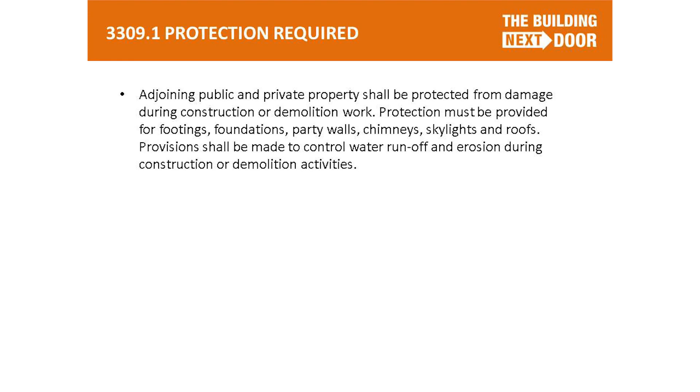Well, when you have this problem, this conflict, what do you do? Well, the developer knows that the building code requires that they protect the adjoining property. Chapter 33 of the code is the one that governs this. It starts out by saying you have to protect, if you're doing construction and demolition, the next door property. Number two, the code says get a license to go onto the property next door, because that's how you'll be able to effectuate things. It doesn't mandate that a license be given to you, but you should get a license to go on there.

And interestingly, it gives an adjoining property owner a real hammer if it's a multiple dwelling. The landlord in the adjoining property could say, okay, I'm going to give you access, but you could have rent stabilized or rent controlled apartments, and they may not give you access. The code says if they don't give you access, that is a basis for terminating the lease. That's a powerful tool in this city with regulated apartments.

Now, three, physical examination. This is something that's in the code, and even if you don't have a license agreement, I very strongly urge that you do this. The idea is you go into the property next door and take a pre-construction survey. It's very important because you take the building next door as you get it. It can be a very old building, and it's going to have flaws. You want to document every single crack, every single problem.

Because if you don't, believe me, they're going to claim that none of that was pre-existing, that it all happened because of your construction. I urge clients also to give that material to the other side so they know exactly what you know.

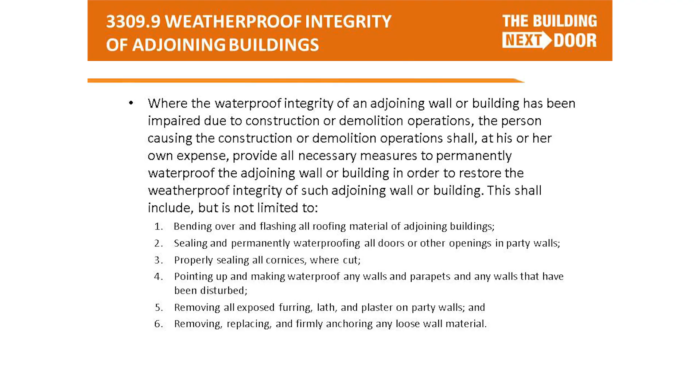Now, 3309.9 talks about weatherproofing, the integrity of the adjoining property. This is something a lot of developers forget about. You could be building — and Rob Schubert will give you a great example, he didn't forget about it, by the way — but they demolished numerous buildings, and you have buildings next door whose exterior wall hasn't seen the light of day in 50, 70, 100 years, and they're not in the condition they were then. They're very porous, very fragile walls. They have to be protected right away.

So you have to do certain things. You certainly have to protect it for waterproofing so there's no water infiltration, because then you're just going to have more damages. But you also have to do things like, if you have a masonry building with wood joists standing for 100 years, those joists are probably not in the pocket anymore. So you have to brace them back, open up the walls, pin them, pull them back, and brace them. You have to stabilize that building before you do anything on your property, and that's very important.

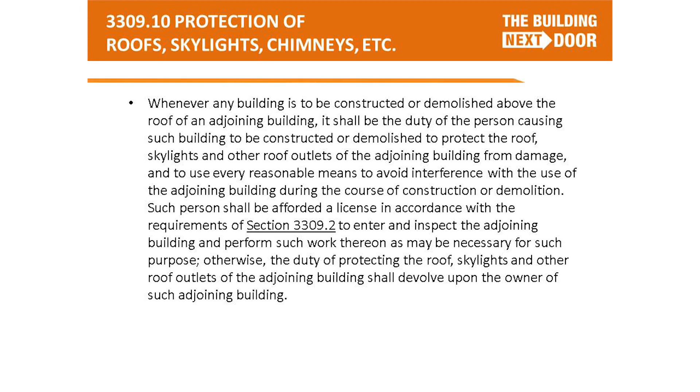The last one I'm going to speak about is the basic one — protection of roofs, skylights, chimneys, etc. If you're demolishing a building that's above the building next door, you have to protect it. If your building is going higher than the building next door, you have to protect it. And again, you'll notice here, if they don't allow you to do it, it says it's their responsibility — doesn't happen. But let's talk about the license agreement.

What are the typical things in a license agreement? First and foremost, you have an express license, whereby the adjoining property owner is saying you can come onto my property and do certain things. Now, the certain things go to the second item, the scope of work, which should be very defined. You want to know exactly what they can do and what they can't do, because problems occur when you don't specify that. A developer will want to focus on the protective work. What I often do is include in a license agreement a set of plans — the site safety plan, of course, and the plans of the building itself.

With emphasis on what it is that the developer is going to do for the adjoining property owner, one thing I do when representing adjoining property owners is insist that we be able to review the entire plans. You get pushback from developers on that, but it's not that we want veto power over the height of the building, the aesthetics, the placement of windows. It's none of that. We want to evaluate totally the construction's impact upon next door, and you really need to see the plans to do that.

I find we have tough negotiations to come into a license agreement. But once you get into a good, comprehensive license agreement with provisions for what to do in the future, you don't have a problem. You have problems when you don't have a tough license agreement that covers everything. Paramount upon everything is safety in the city of New York, and the courts want you to be able to construct things in safety and protect the public.

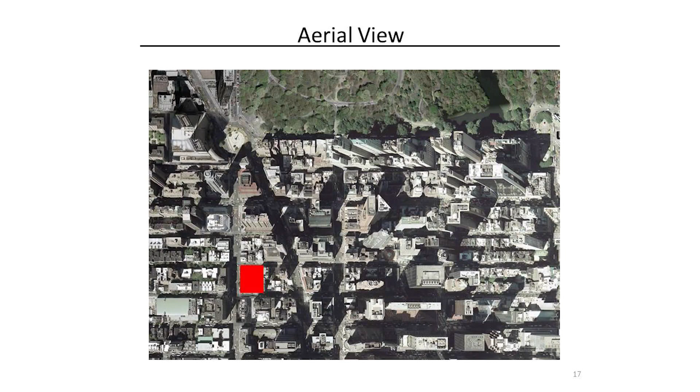So the site is a 1 acre site between 54th and 55th, bounded by 8th Avenue on the west and by 2 relatively low 4-story buildings on the east side.

Designed by SOM, it's a 38-story building with 2 50,000 square foot below-grade floors, 1 million square feet.

When we acquired the property, there were 9 existing buildings on the site, mostly small 4-story tenements, but there was a 14-story building on 55th Street that used to be the Hearst Corporation headquarters. And on the south side, there was a building called the Department of Labor building, another 8-story building that I'll get into shortly. This project has a long history.

We got through foundations, and partially due to the fact that we ran into problems I'm going to talk about, the project ultimately got caught up in the financial crisis. The 500,000 square foot tenant we were negotiating with stalled in terms of negotiations and concluding a lease, and ultimately we mothballed the project for about 2.5 years.

We restarted the project in 2011, and the first 250,000 square foot tenant is moving in this weekend.

So this gives you an idea of the site, and not only did we have the building next door, we actually had one of our own buildings next door.

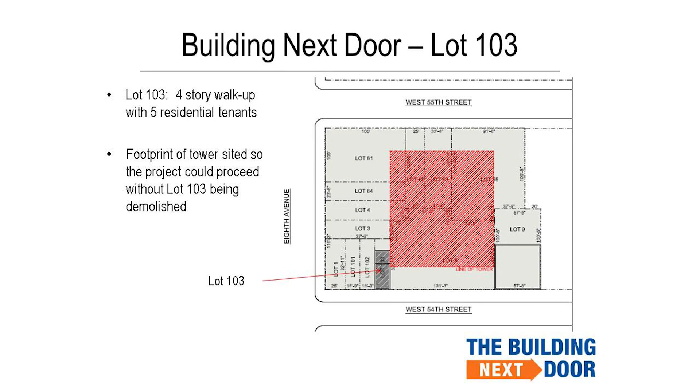This building here, called Lot 103, was one of the tenement buildings, and we went through a whole long procedure of buying out the tenants, getting these five residential tenants out, but as always, there was a holdout. We were prepared to build around this guy just because we had to for our schedule. Ultimately, we did come to an arrangement with the gentleman, and he vacated it. But that's basic - you'll see a better photograph in a second.

And then it comes to Lot 9. As part of the acquisition, we own the air rights to this building. We had a license agreement to underpin the building. We had everything that we needed to get DOB permission, in terms of forms for underpinning, the whole 9 yards.

And I got a call the day that I sent the DOB forms for the adjacent property owner to sign. He says, 'I don't care - buy my building.' And it was tens of millions of dollars.

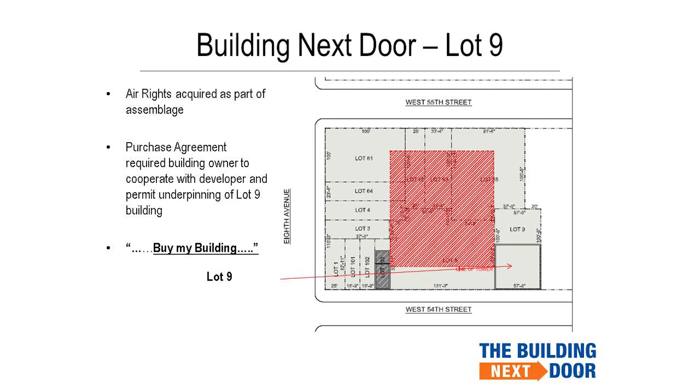And this building here is actually 3 tenements stitched together, rent stabilized, rent controlled buildings. There were some tenants in there since the 1950s.

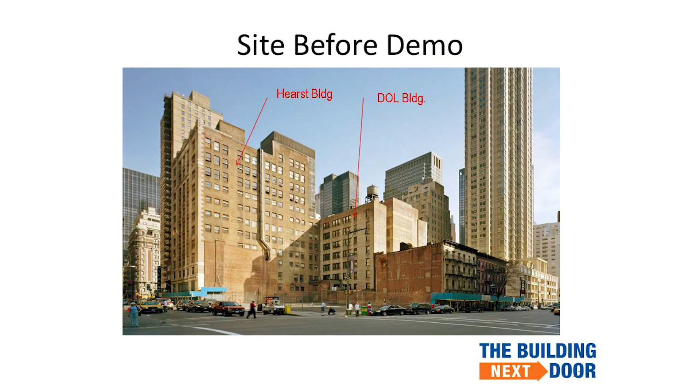So this is a view looking west on 54th Street before demolition. The Department of Labor building is sitting here. This was the Lot 9 building, which still exists today. In fact, now there's another hotel sitting next door to this one as well.

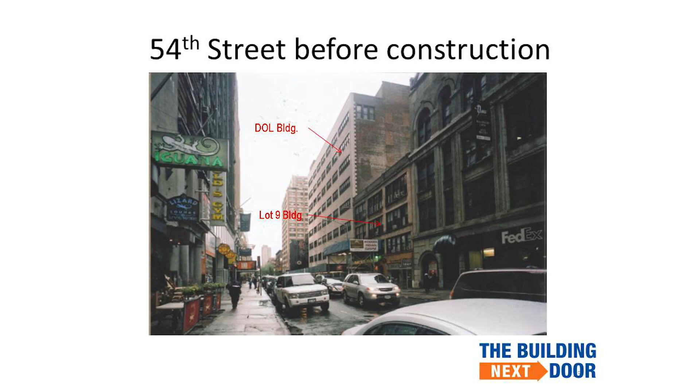It was indescribable in terms of how many issues came up. In terms of due diligence, we did all the due diligence that we could possibly do. Unfortunately, we had limited access to both the Lot 9 building and the Department of Labor building. The Department of Labor had a lease they wouldn't get out of. We had very limited access to get into this building, to do probes, to find out what the heck it was. And in my 35 years of doing this, this is the most bizarrely constructed building I have ever encountered.

It had cast iron columns, it had Roebling arches, it had plate girders on the 7th floor - apparently it was an automobile showroom at some point, and that was all done after the fact. We didn't know any of this when we got into this monster. And so it was a very interesting demolition process.

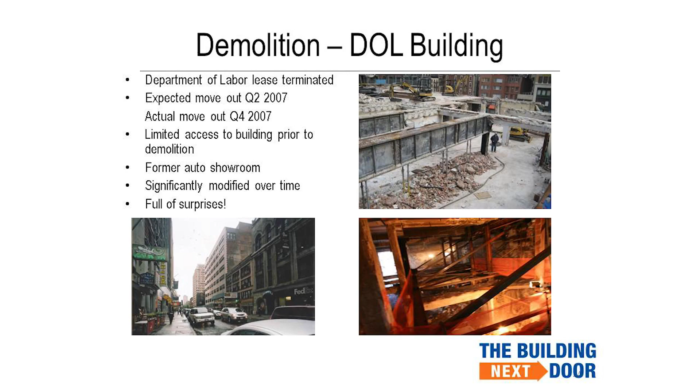This gives you the Lot 103 building. The Hearst building is almost all the way down already. This 14-story building came down like a charm, not an issue.

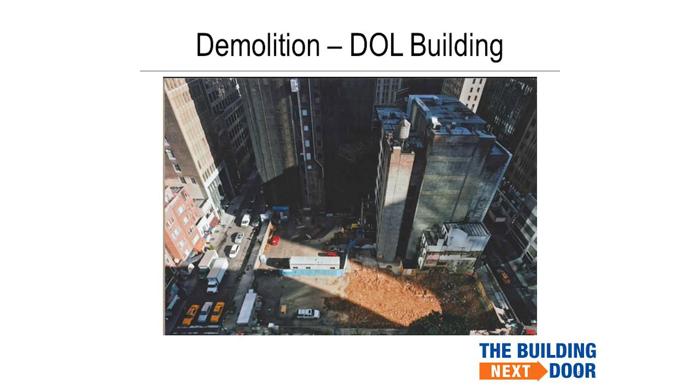The adjacent property owner worked with us, gave us all the access we needed, and then there's this Department of Labor building. So we brought it all the way down from the 9th floor down to the adjacent parapet of Lot 9. And lo and behold, when we got down there, it's difficult to see, but this is the Lot 9 building west wall.

It was 2 wythes of brick thick, and we didn't know it. So my friend Tim here graciously gave us a stop work order till we figured out what the heck we were dealing with. It was totally justified, but very frustrating.

You can see here this is the floor spandrel of the Lot 9 building, and this west wall is 8 inches thick, and it was basically glued to this thing. So if we tore this down, this building is going to fall down.

So we worked with Tim and his group and with a variety of structural engineers and shoring contractors. We had to do 2 things. This is where Ray got involved, and we went through 9 months of court proceedings.

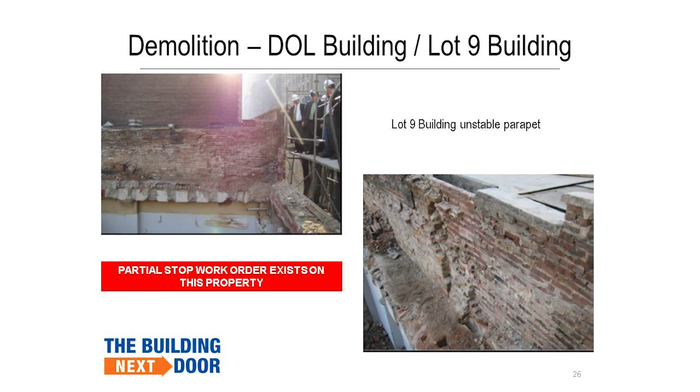What initially started out as a proceeding to get permission to underpin the adjacent building quickly devolved to something else, which was, as Ray mentioned before, where you have to go in, tie the floor joists together, and stabilize the existing building.

If you see all of these channels, what this represents is us drilling a hole through the adjacent building, opening up the ceiling in the adjacent apartment, putting a plate on to basically stitch the floor joists together to secure it to our building.

So what we ultimately ended up doing was leaving the 18 inches of existing construction and underpinning that. We never, in fact, underpinned the adjacent building. We underpinned our own building and stitched the adjacent building to it. But what this represents is 2 things.

We had to come up with a procedure to stabilize the existing remaining bay of the DOL building, which meant we had to build a building within a building. So this is all structural steel stabilizing this wall, stabilizing the floor plates, and we had to do it floor by floor. It became a nightmare.

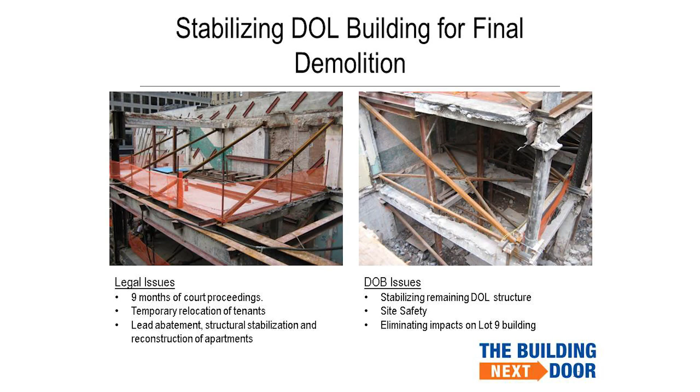What you're seeing here is after we got the building stabilized with structural steel, it took us about 4.5 months under a partial stop work order, with many meetings with the DOB in terms of sequencing how we went down, because again, as we opened stuff up, we didn't know what the heck was there.

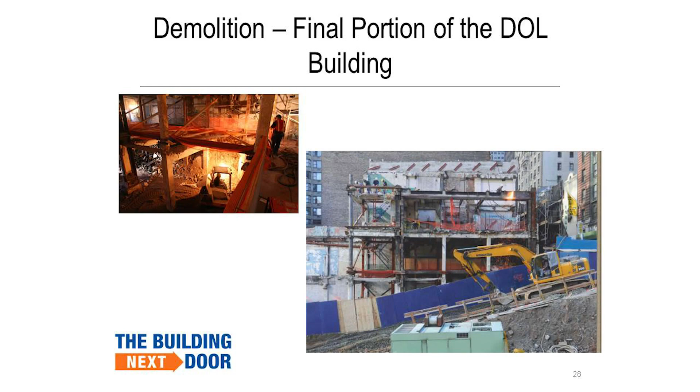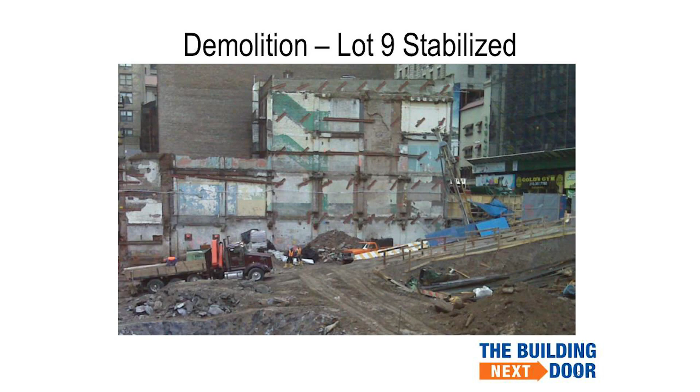Ultimately we got to the point where we could remove the entire building. This is what you're seeing here. It says the Lot 9 stabilized, but this is the remaining 18 inches of wall of the DOL building.

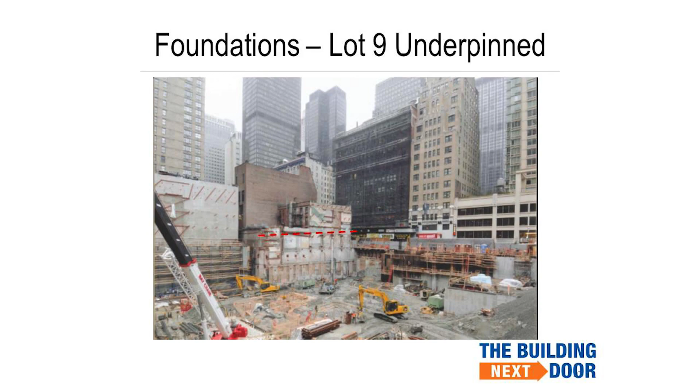What started out as an underpinning job, what you see here is once we had the whole thing down and excavated—this line is a little off, but that is street level—this is all of the underpinning we had to do to hold up this adjacent building.

So going through the whole court proceeding was a painful process. We actually needed a court-ordered schedule to go into each individual apartment. Mind you, it's a 100-year-old tenement.

We had to abate the lead paint. First, we had to relocate the tenant for a temporary period under a very strict schedule. We had to go in and do lead abatement because it's all lead paint. You don't want to disturb anything because you're going to rip the ceilings open.

Tie the building together, and then we had to go back in and basically sheetrocked all the apartments, and everybody got nice new apartments—some of those apartments hadn't been painted since 1964.

So, with all good intentions, we had all the legal documentation that we needed, but this whole slowdown ultimately resulted in us losing a tenant. We ended up mothballing the building—basically the 1 acre floor plate mothballed for 2.5 years.

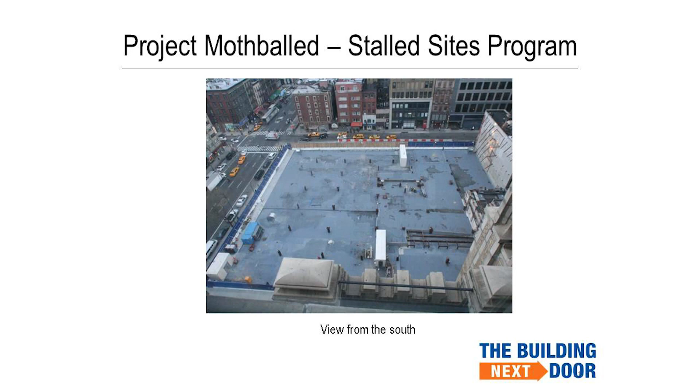But eventually, we got to build a new building. So I urge you, when you're considering constructing a building and you've got next door neighbors, do all of the possible due diligence you can. It's extremely cheap money. Good relationships with the neighbors is sometimes really impossible in my case. But I urge you to do as much as you can to get access to the existing building, to establish a good license agreement that allows you to do what you need to do quickly. Because the alternative is it can slow you down and cost you a great deal of time and pain.

Now a fellow who everybody needs to be very nice to, Mr. Lynch. The real risk to bringing a new building out of the ground is rarely the building itself, which you have a lot of control over. The real issue is what's on the lot line. And in New York City, we're a very dense urban environment, and we've been a dense urban environment since 1812, since the Commissioner's Plan. We have a population of 1 million buildings, and as a regulator, we're not the developers and we're not advocates for the buildings, but we regulate the new buildings.

And we've had regulations in this city since the 1600s and even before then. And it's clear because you've got fire and life safety, you've got a material science, you have an engineering issue, you have a zoning issue, and you have a protection of the citizens in New York.

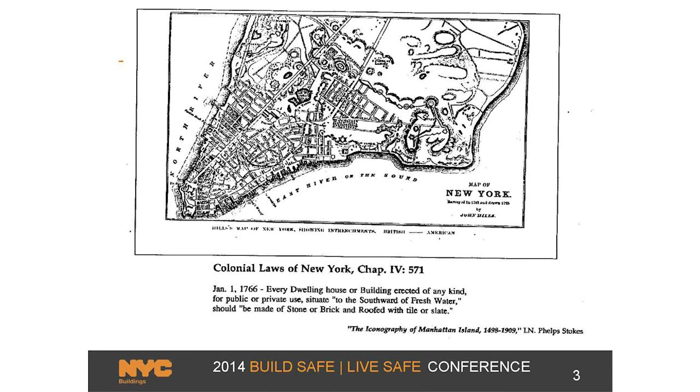What have you got on the lot line construction with the existing buildings? Have you got a building that's permitted, under construction permits? You do not. You have a building governed by a Certificate of Occupancy. And the whole setup for that building is different. It's an occupancy, a building that's been standing there. It's just working for a living. It's not under construction. If you want to find out how frail or how stable that building is, you need a toolbox for it.

Okay, so what have we got? Here's two different types of buildings. They now both have C of Os. The building on the top left-hand corner was absolutely engineered. It's from the '20s - it was a primitive code, but it was engineered. They had the material science. They understood how the columns worked, how the connections worked, they understood load paths. That building was engineered.

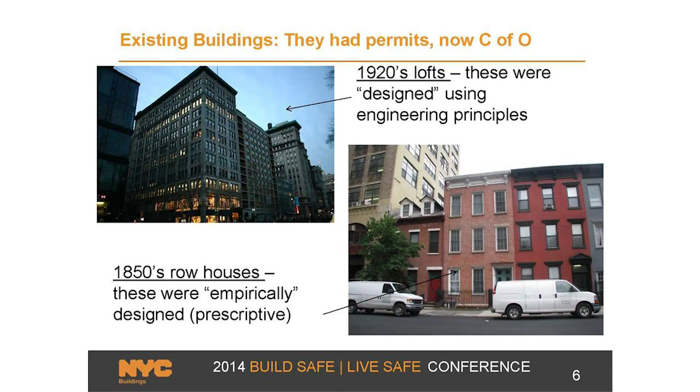Those empirically designed unreinforced masonry buildings are the ones that move around a lot. The frame buildings have a tendency where you can get your hands around them - you know where the loads are, you can understand the engineering principles, usually you can find drawings for these things. The bottom right-hand side, there are drawings, but you've got to know where to look for them.

Undefined load paths, alterations, frail walls - why are these things stable? Because they had some very basic rules that made these buildings stand where they are. They were locked in with each other. They didn't move left to right, very low aspect ratio. All the walls were locked in. The wall thicknesses were governed in the codes - it actually said what wall thickness. It was governed in the codes from 1835 onwards.

Floors - usually floors, they deflect. But one of the rules set up in the building codes is you got to prop them around the stairs. Who cares if it deflects? We got a secondary support, something around the stairwell that props these floors. It wasn't important.

They kind of got around a lot of the engineering issues by making these sort of empirical design rules. And that's the snag with a lot of these adjacent constructions. They actually are empirically designed, and they're hard for engineers to get their head around.

We recycle sites all the time. There is nothing new about the discussion we're having today. It's been around since the 1600s. We have this same site on 6th Avenue right now. They recycle these sites, and there's been rules governing adjacent construction since the 1800s. I'm going to show you a provision in the 1855 code saying you must protect adjacent buildings. A lot of this stuff for adjacent buildings is actually in today's code. You can see the genesis and the family tree going all the way back to the 1800s.

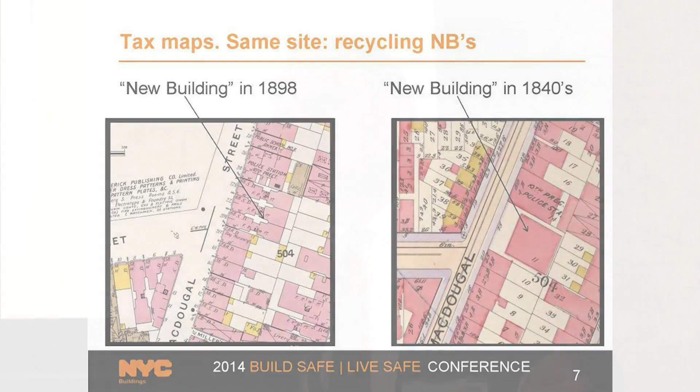We recycle sites all the time. This is why I think that circle's useful, because it's not like we take a site out of service. Most sites actually get recycled. And when they get recycled, how long have we been recycling sites in the city? Since the 1600s. There's always been something, mostly on these sites, basically from about 1812 onwards. But in Manhattan, these sites get recycled a lot. So what you think is new and a problem with the neighbors, there's nothing new with this.

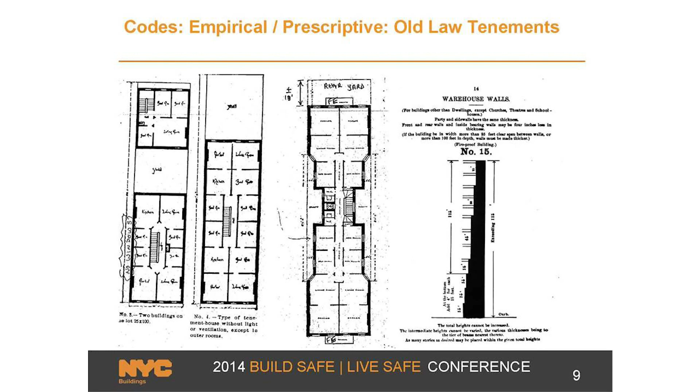And here's some code provisions - fire cuts and a cumulative load. They had some engineering guidelines on some of this stuff. People say, oh, you can never find any data on this thing. Actually, that's not quite true. There's not a lot in the textbooks that govern it, but if you actually look at the building code and the provisions in the building code, it was actually quite tightly specified.

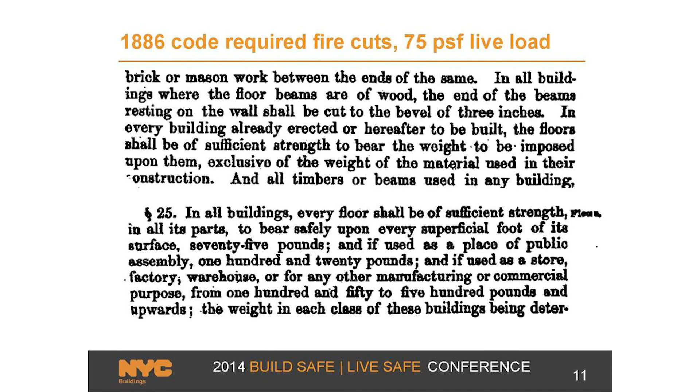So you've got a duty to use sound engineering design, safe construction, demolition practices. Where is that found right now for the duty of maintaining the adjacent building? So you're up out of the ground already in Chapter 33, generally - that's a dialogue you've got to have before you get to the site. Adjoining wall, Chapter 33 as well. So if you contemplate these risky issues very early in the job, there's nothing to say that the site you're developing is exactly right for that site. The 30, 40-foot deep basement may not be suitable because you could have this banger on the lot line that you haven't really taken into consideration.

We've all had those stories, but there's nothing unusual about them. You can figure out how they're engineered. And there's the 1886 code - I'm just giving you a sample that there's nothing new about this. It goes back 170 years and even older.

The protection of the adjacent site to maintain these is good for business. It's in the code, it's not elective, it's just what it is. And most of it can be boiled down to engineering issues, and it can be risk analyzed. And that's what my job is - I have to make sure that everybody keeps these adjacent buildings safe.

I don't always stop them. I let a lot of jobs go, and we bring a lot of institutional knowledge to the site. We negotiate with the neighbors, we help, we dialogue, and we bring engineering to the neighbor's lot - we can help with orders there. We do a lot to mitigate these sites and bring the new development sites up out of the ground. We work with the neighbors - usually we have a relationship with some of these guys. It's not all about stopping the projects. We want to put people to work as well.